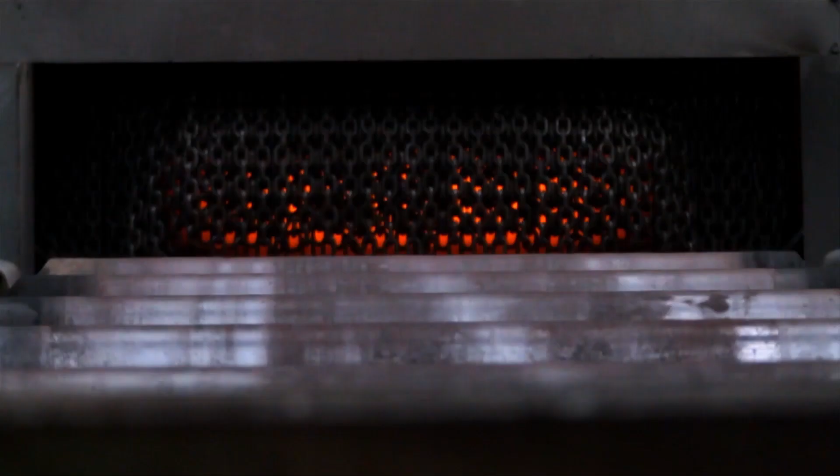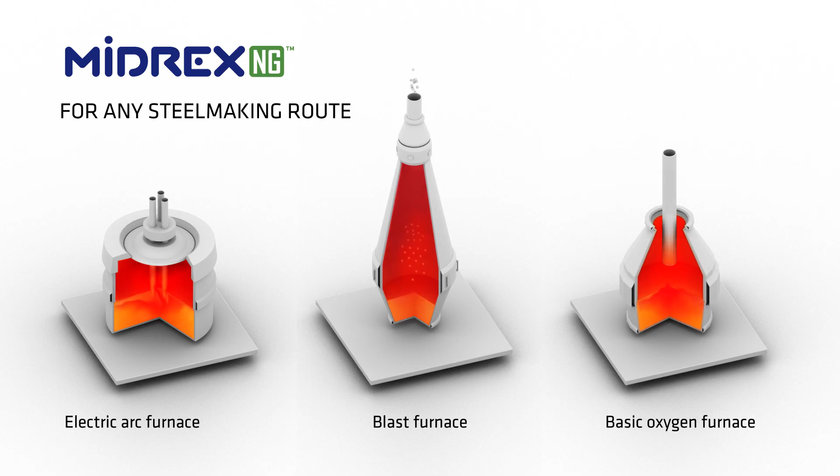A brief description to understand the picture. It is no secret that there are fundamental commodities on which all human civilization rests: oil, gas, coal, steel, and others. The existence and development of civilization as we know it today are impossible without them. This makes such commodities extremely merchantable and constantly increasing in price.

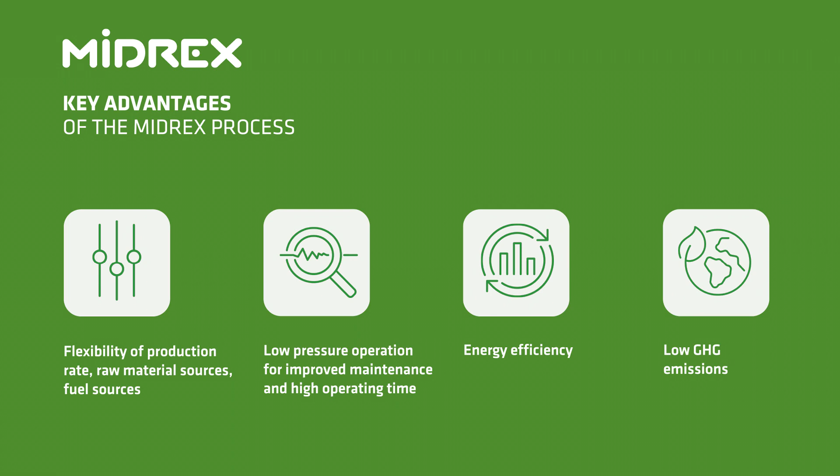For example, global steel production is only going to increase, and the price of steel is going up. Global steel production has doubled in the previous 15 years. Steel is smelted with expensive coking coals, electricity, and gas. Naturally, prices rise every day, and the non-renewability of energy commodities makes the price of steel higher and higher every year.

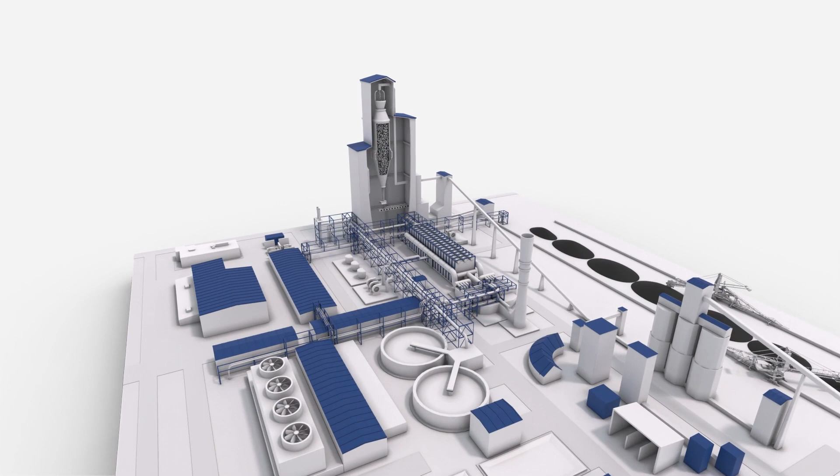I want to talk about an extremely closed subject, in which very few players are active, and which, like a carrier rocket, throws its owner upward financially, like all the famous oligarchs who somehow took possession of the metallurgical enterprises, and now Forbes writes about them.

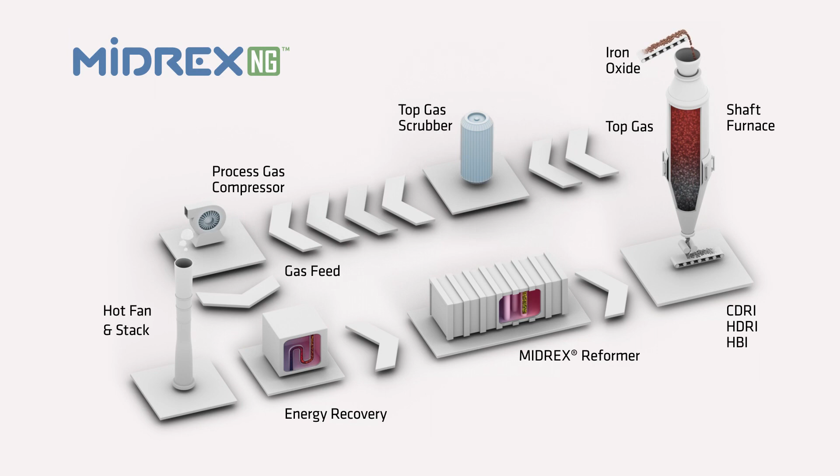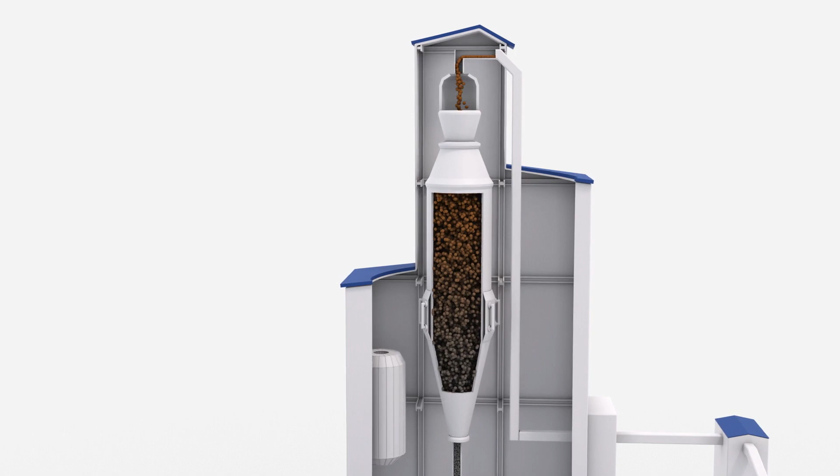Direct reduction iron is used exclusively in electrometallurgy as a raw material in steel production. It is a direct and very serious competitor to scrap metal and cast iron. And in metallurgical literature, this method is considered to be one of the most promising directions of effective development of world metallurgy.

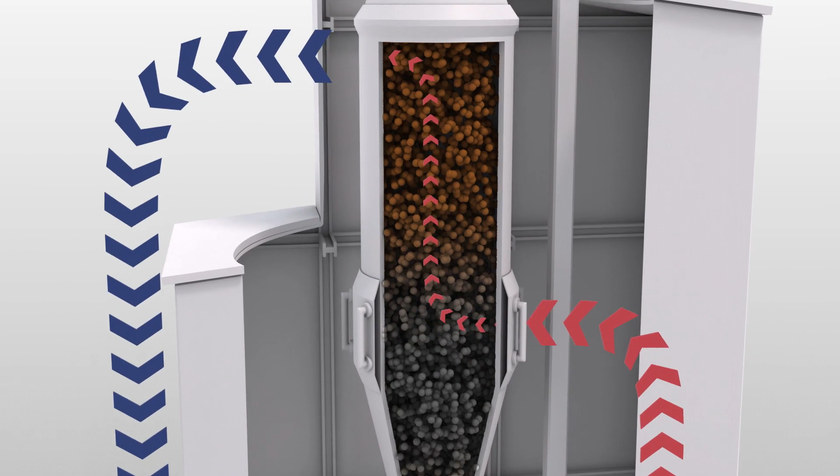Why? It is known that the use of iron reduced in this way during steel melting in electric arc furnaces allows to produce the highest quality, cleanest metal without harmful impurities, suitable for use not only in standard industries but also in high-tech.

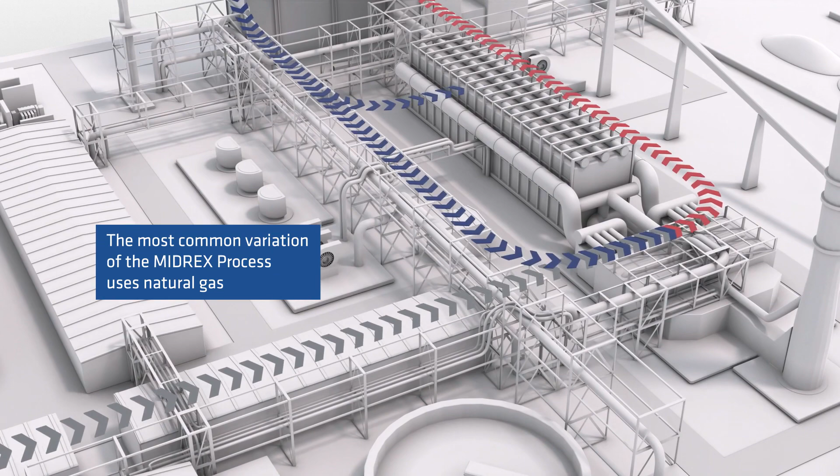I liaised with a man dealing with this closed subject for a certain period. He focused on extracting precious metals from mine rocks and slimes. While others passed by the waste heaps, he analyzed their composition. For example, one day he stumbled upon a useless waste heap, which, according to his analysis, had a high gold content. He immediately bought and recycled it, making a fortune.

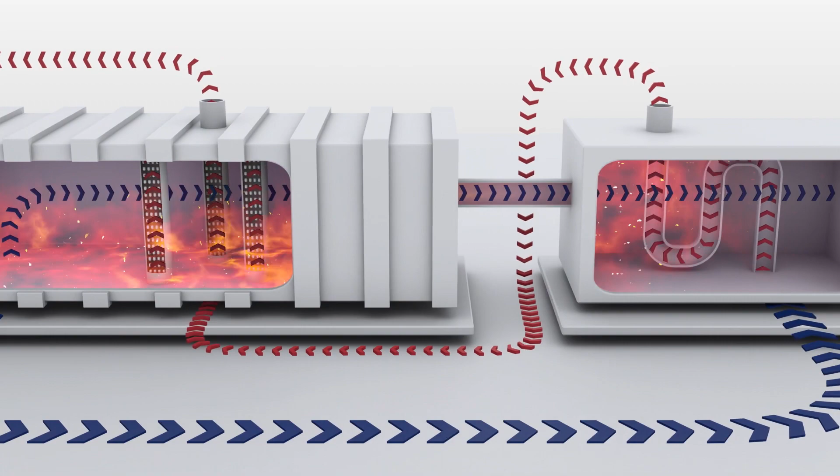In the process of our communication, he bought one of the sludge pits, from where he started to extract valuable metals. As for direct reduction of iron, we tried to create a program for the reduction of fine iron oxide with generator gas. But neither he nor I understood the relevant technology at that time.

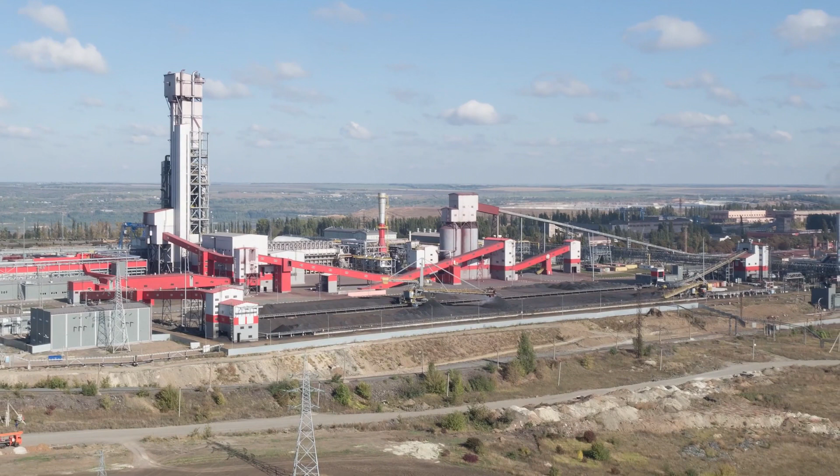All he was able to find was a place near Kryvyi Rih where iron oxide came in wagons to be processed and came out a finished product after reduction. Somehow he managed to negotiate and find out that it was a furnace operating as a tunnel brick kiln, where pots of metal were driven on carriages and fired in a gas environment.

No one was allowed in, not even to look at the facility. The subject was quite closed and profitable. In the end, my acquaintance left for the sludge pit he bought, and everything remained at the level of words.

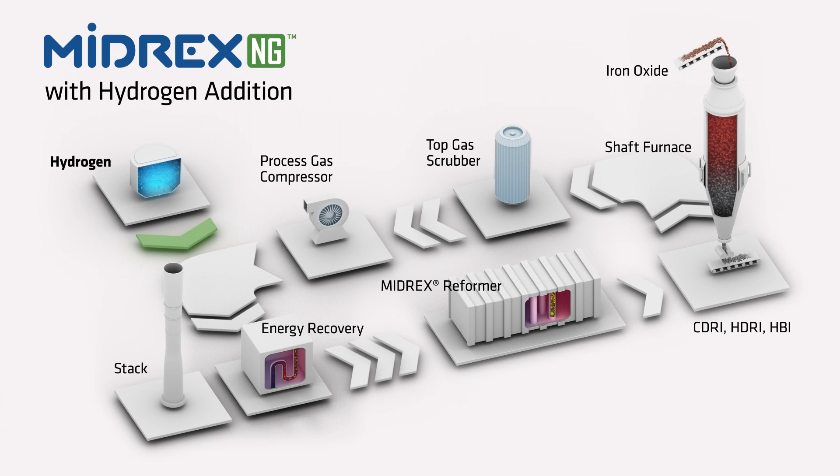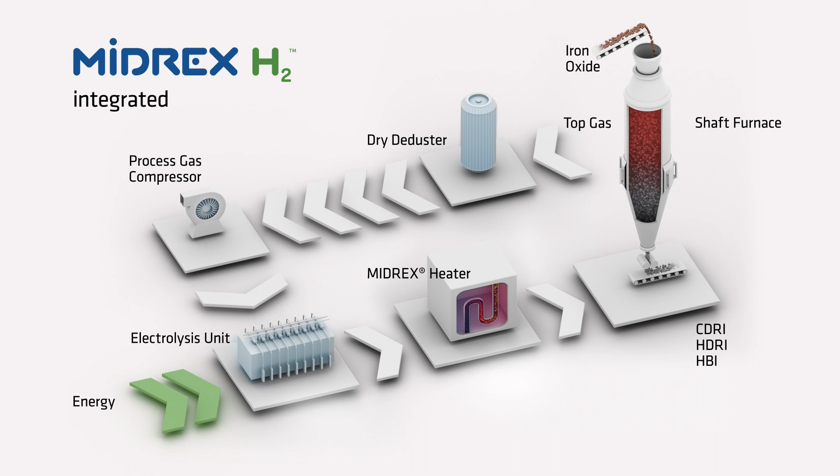And so yesterday, digging out something interesting from my channel, I came across an article about how this subject was dealt with in the West. A fluidized bed gasifier was in fact used to directly reduce iron there. I decided to make a video about this article, which I present to the public.

And this video is also an attempt to find interested persons who would like to work on this matter. A little more about the process itself and then about the facility described in the article.

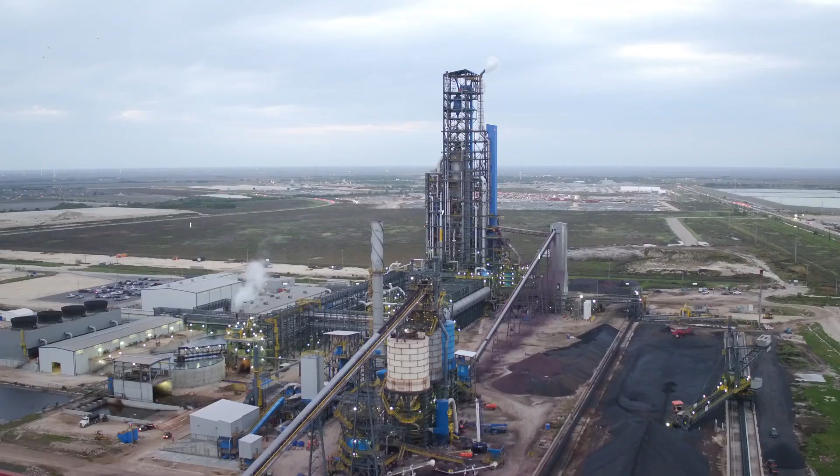Direct reduction of iron is its reduction from iron ore or pellets using hydrogen and carbon monoxide, essentially generator gas, or ammonia and solid carbon. The process itself takes place at a temperature of 1000 degrees.

Such terms as metallization, partial metallization of ores, direct production of iron, direct reduction iron metallurgy, and coke-free iron metallurgy are also used in reference literature. The product of the process is called direct reduced iron.

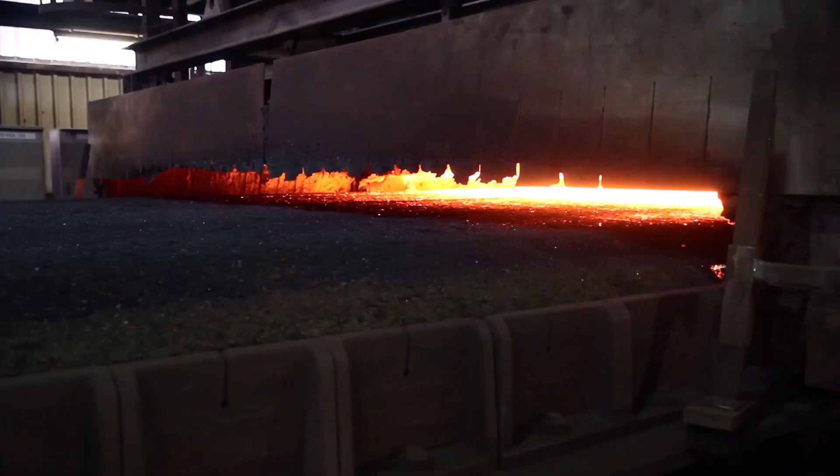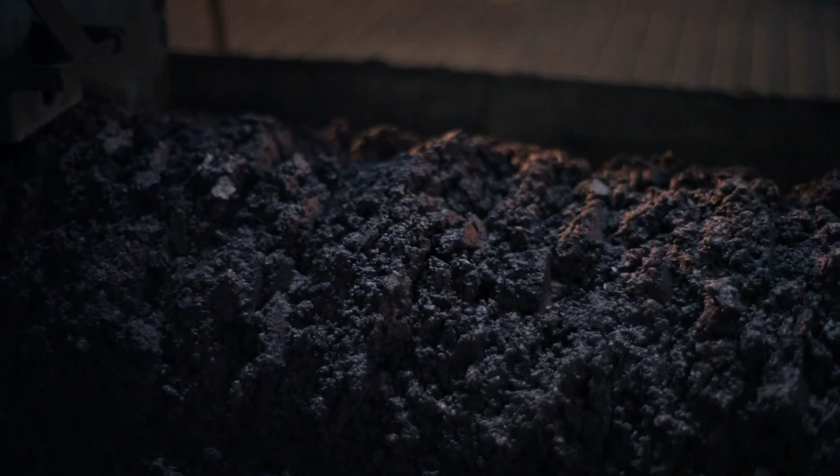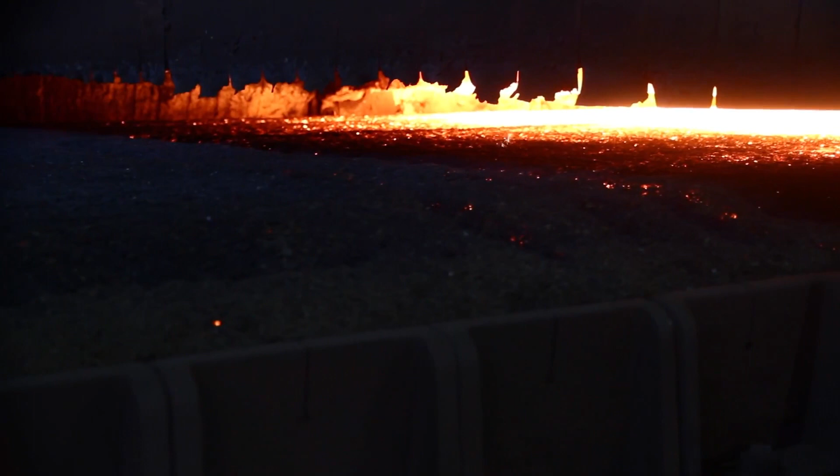Attempts to obtain steel bypassing the blast furnace process were made in the USSR back in the 1950s. Industrial production of iron directly from ore, bypassing the blast furnace process, without using coke, appeared in the 1970s. The first direct reduction plants were low efficient, and the final product had relatively many impurities.

The process began to spread in the 1980s when large-scale natural gas began to be widely used in the mining and metals sector. The gas was ideal for the direct reduction of iron ore. In addition to natural gas, it was possible to use gasification products of coals, in particular lignite, associated gas from oil production, and other fuels acting as reducing agents in the direct reduction of iron.

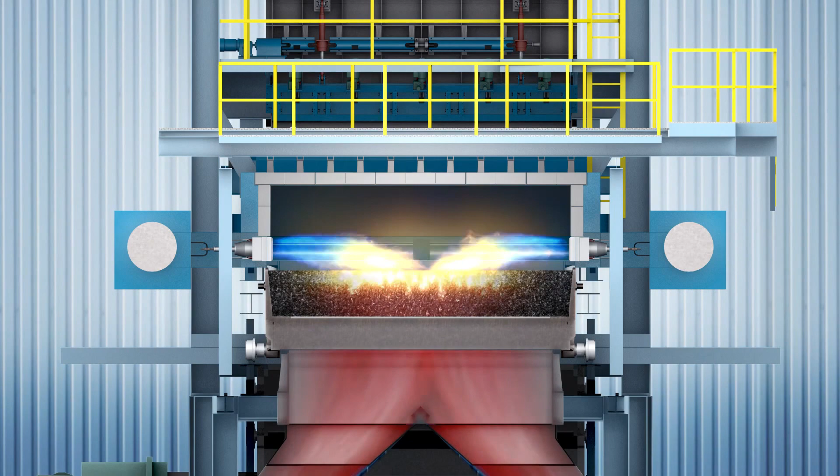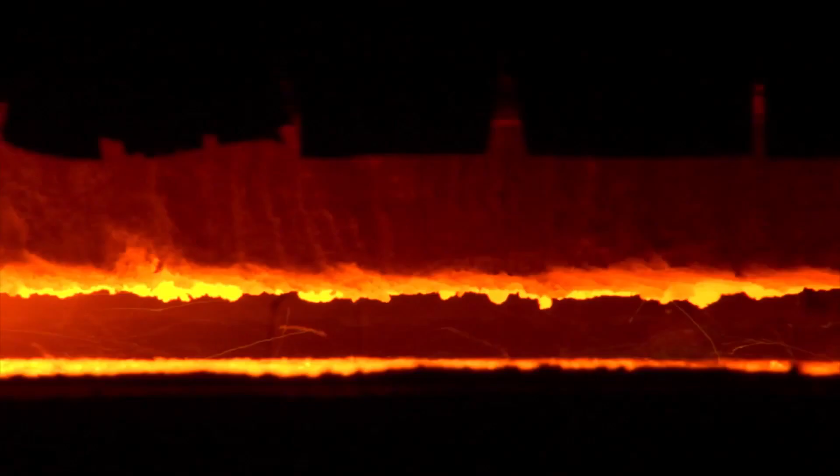Technological changes in the 1990s made it possible to significantly reduce the capital and energy consumption of various direct iron reduction processes, resulting in a new leap in outputs of direct reduction of iron.

Now, while making this video, I managed to find analogs of this technology in world practice. These are Midrex and FINEX companies.

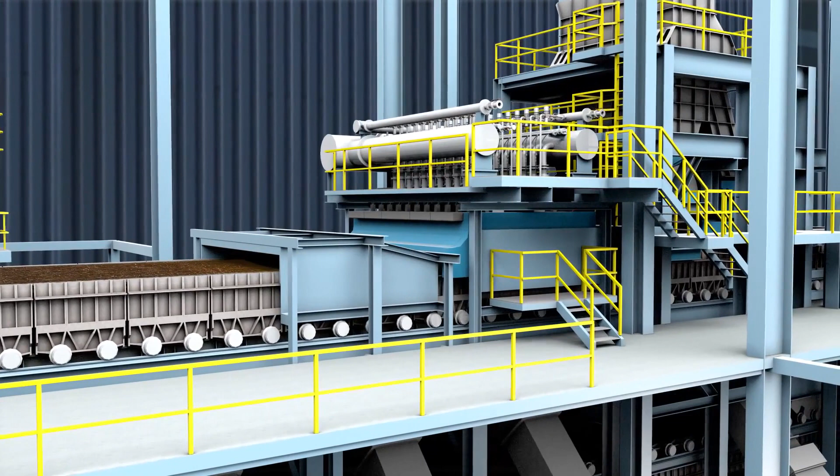What happens is that iron ore fines, which make up 80% of the total amount of iron ore, must go through a preparation stage, i.e. the process of pelletizing and sintering, in the blast furnace process.

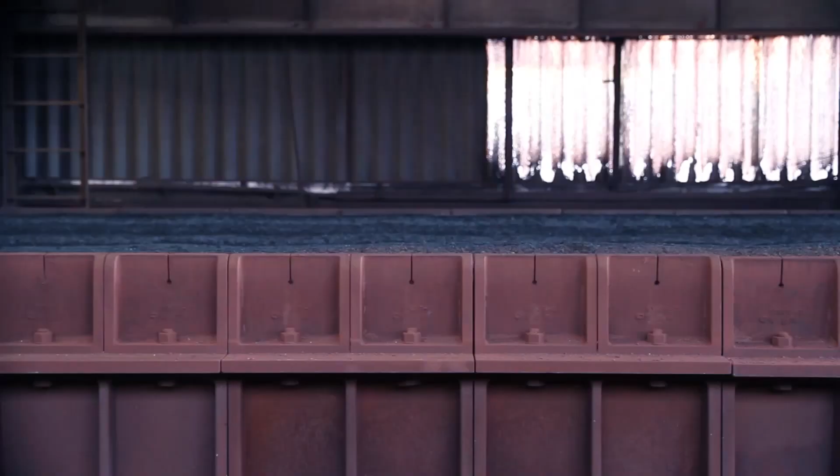On the contrary, fine iron ore can be directly loaded into the reduction process when using fluidized bed technology. This method produces iron of the same quality as traditional blast furnaces but avoids coking and sintering of fine-grained ore.

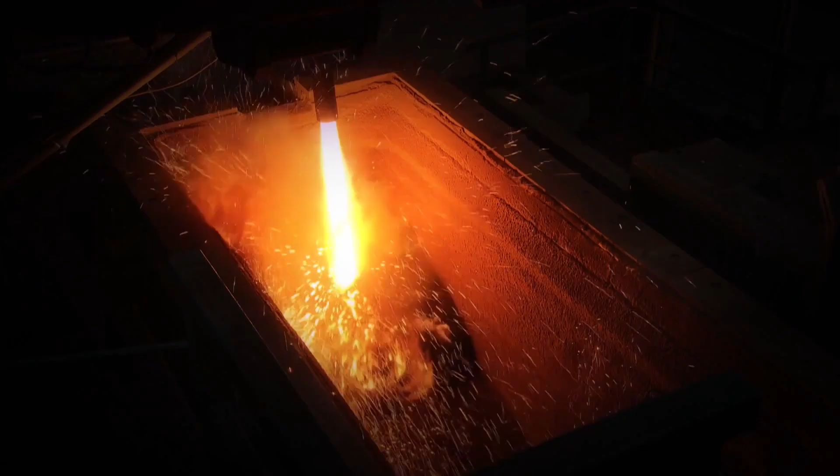The loaded iron ore passes through fluidized bed reactors where it is heated and reduced to direct reduced iron. Then it is loaded into the melter gasifier, where the final reduction and smelting take place. Generator gas is produced in coal-fired gasifiers by feeding them with oxygen.

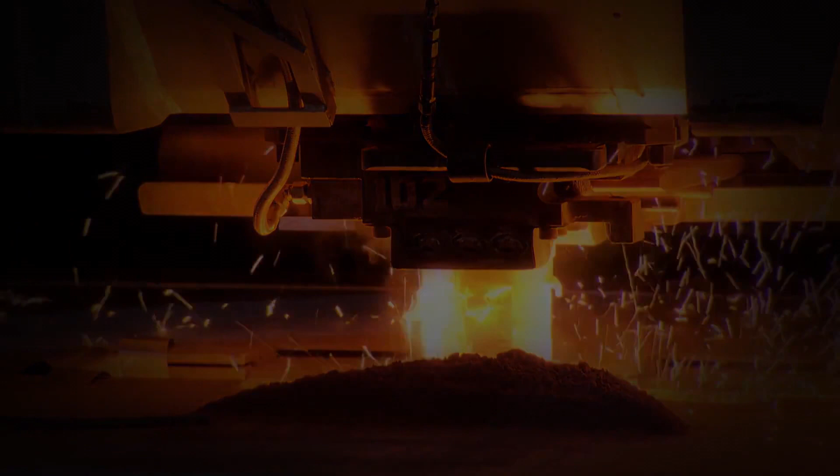Another advantage of the process is the waste combustible gas, which can be used for heating in a steel mill or to generate electricity.